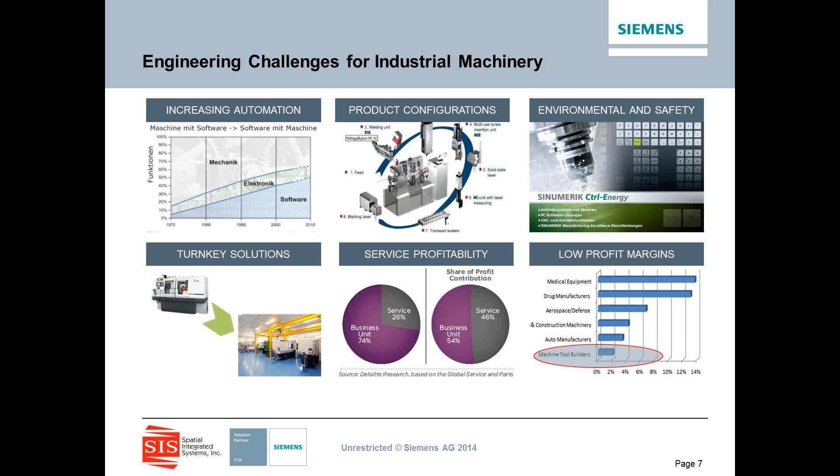And what the industry is seeing out there, and this isn't just what Siemens is saying, it's what analysts are talking about, is that machine tool builders, the last one on the list there in the bottom right corner, are seeing the lowest profit margins in history, while medical equipment and drug manufacturers, maybe not to the surprise of many folks on the call today, are very highly profitable areas in today's marketplace. So how do we help those machine tool builders? Because we still need that huge industry out there to be successful.

So when you look at the six images on the screen, what do all these products have in common, from beer to computer wafers to cookies, jewelry, maybe a tablet of some kind, and a tire? Well, the one common thing they all hold is the fact that each one of those is made with a specialized, complex piece of machinery. Right? But each one has a very specific task and how it has to accomplish those things.

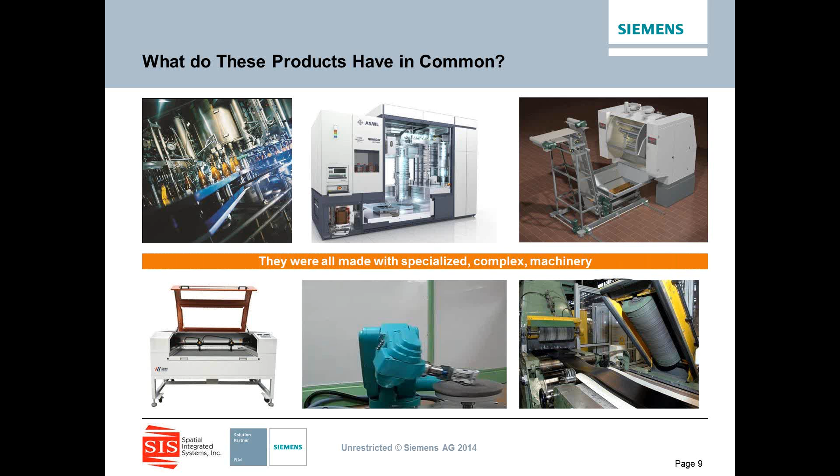And that's how NX can help you get your job done more efficiently. So what's the impact on the business? Really, again, we talk about you need to have machine design that's more flexible. We've got to make sure that it's not too difficult to reuse existing designs. So where there is some commonality from one machine to the next, be able to reutilize all of those components in your next design very efficiently.

Being able to find those components sometimes is just as important as knowing they existed in the first place. And most customers struggle with being able to find those previous designs. You need to be able to manage those customer requirements more efficiently and what your customer needs for their designs. And, of course, meeting those time-to-market goals. And we have a lot of tools to help you complete all of these tasks.

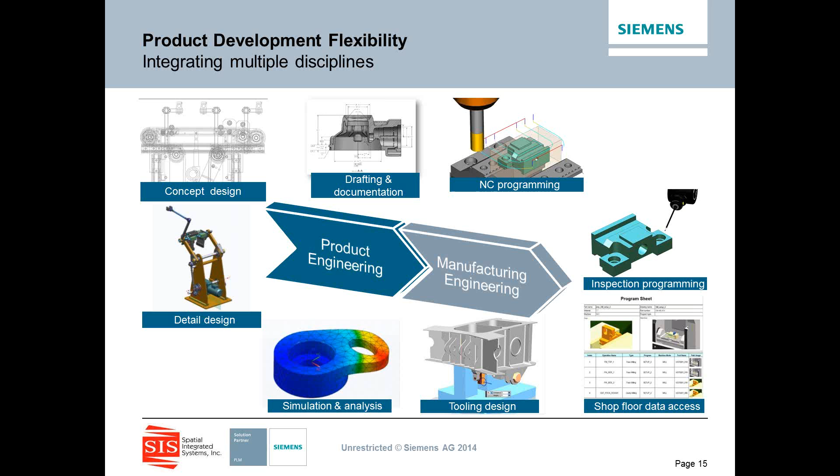We may need to do simulation and analysis to make sure parts aren't going to fail when they get out into the field. Of course, do the NC programming to put tool paths on these components and manufacture these on your shop floor. And for that, you may need tooling design, as you see in the image in the bottom of the screen, for fixtures. Again, NX is well suited to do all of these disciplines for you. And then finally, even inspection programming with CMM, coordinate measurement machines, making sure that you're checking those components, that they're right based on the original designs.

So it's one thing to talk about how all of those different things are required in your workflow. It's another to show how this actually functions through the NX product suites. And it's done in the way we call the master model process. It's all focused on reducing your engineering time, making sure you have fewer errors, because those errors are really the most costly of anything out there, and making sure that you have process standardization so you can repeat this process over and over in the future to be more efficient.

So when you look at the image here, really what it represents is a machine design on the left-hand side of the screen for the NX master model with thousands of parts and components in it, lots of moving components. This is actually one of our customers. It's a machine that packages up roof tiles.

Well, as you start that design, the standard workflow in the industry in the past was you'll design the entire machine and then start to pass that information downstream for maybe analysis, manufacturing, fixture design, those types of things. And if a change takes place, you have to stop all those downstream applications and kind of restart the process again, make the changes in engineering, and then pass those downstream again.

What's nice about the NX master model process is we can take these things and work on them concurrently versus in series, as an example. And by concurrently, we mean that we've already designed part of the machine. We take that on into analysis and simulation. We start to work on fixturing and tool paths. We can do all of these downstream applications to it.

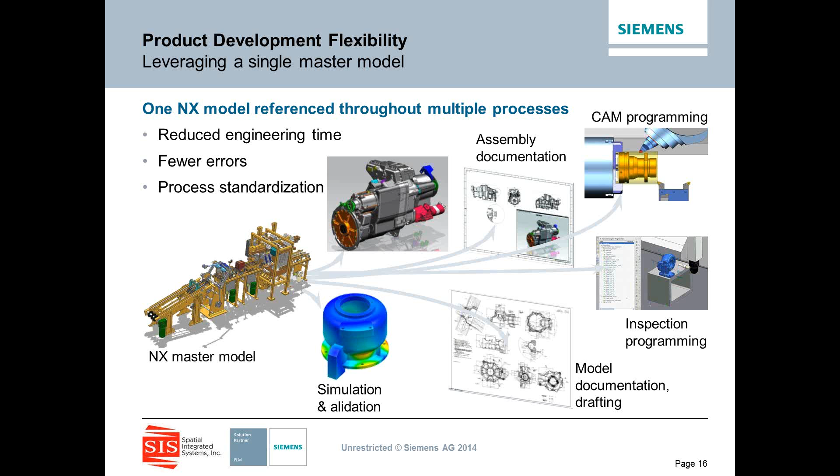So what happens when there's a design change that takes place? All of it ripples through the design automatically for you. As that design change happens, your analysis will be recalculated, your drawing sheets will be updated, your fixtures will be changed automatically, and your tool paths will update automatically. These are the time savings we talk about with a fully integrated solution that few companies offer in the industry today.

Now, when we talk just about the design side of things for a minute, so just focusing on CAD, we bring the best tools for you to boost productivity. First and foremost, we certainly offer parametric feature-based modeling. And that's traditional modeling where you go out, you put dimensions on a block, and if you change those dimensions, the block stretches to the new size. And that's been around for many years.

What we've introduced is a patented technology. It's unique to our company itself and Siemens, and it's called Synchronous technology. And this is a tool that allows you to use multi-CAD data if you want to. So I can bring in files from other CAD systems and make these types of design changes very quickly and easily. It allows for very quick design evolution and is fully integrated with feature modeling. So whether you want to use the feature-based modeling or the synchronous tools to literally stretch and pull your model exactly how you need it to look, they work at the same time together with one another.

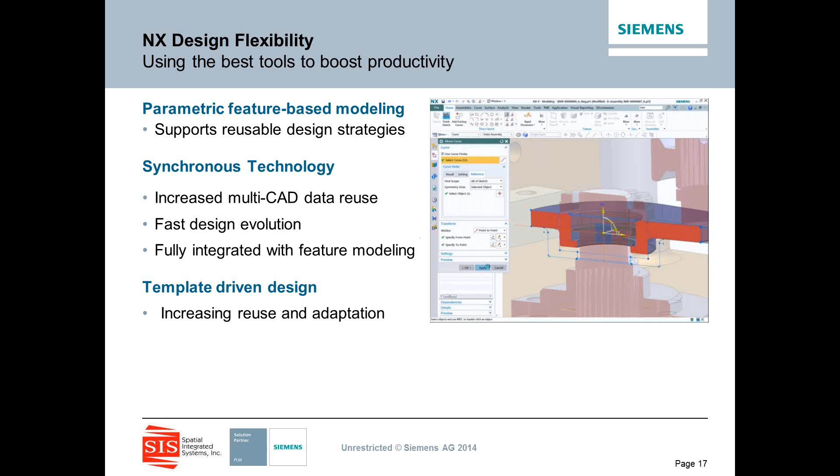And we have template-driven design. And what we mean by that is having tools to create family of parts type of solutions, but family of parts on steroids. And I'll describe that here in just a few minutes for you.

So let's look a little more at synchronous technology. As I stated, this is something unique to Siemens in the industry, unique to NX. And what it allows you to do is using it on existing files you've created in NX or on third-party files. It may be a STEP file. It might be a SolidWorks file. It might be a CATIA file. And you can bring these into the NX environment and make design changes to them.

Well, you can imagine if there were dimensions on there or if there were steps of how it was created originally, you may or may not understand exactly how that was created in the first place. So it's tough to know how to make a change. With Synchronous, you don't worry about that. So if I had a guy design this 5 years ago in my engineering department, I don't really care how he created it in the first place. I don't have to even analyze how he did that.

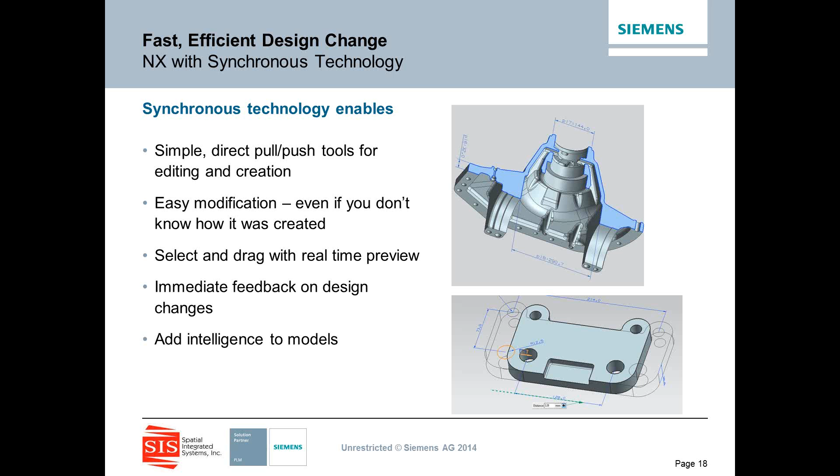I just go in, grab the faces I want to move. Maybe I want to apply some dimensions to it and drive those dimensions here with our Synchronous tools. Very simple, very easy, with immediate feedback, and you can add that intelligence to the model. So if you bring in a model from another CAD system, there's no dimensions or anything on it, we can place those dimensions onto it and drive those accordingly. Again, unique and incredibly powerful in the industry today.

The next area is something we call Product Template Studio. The images at the right start to give you a little bit of an idea of what it's capable of doing. But this tool is all about creating, you think of it as family of parts. So you have a part that may have 5 or even 10 different configurations that you may want. Now, most CAD systems out there today are going to give you the tools to make a family of part design. You can model it up one time, stretch the value, save it off as another design, and have those kind of in a chart. What we allow you to do with that, though, is actually embed validation.

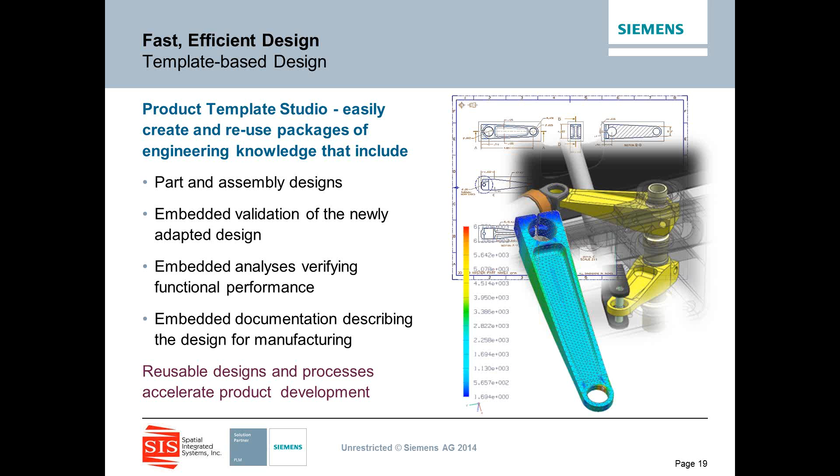And what we mean by that is you can embed analysis into this, you can embed the documentation into this, so that if you make a change, you can have a list come up on the screen of what component you want it to look like. You click on it and it changes. But as you change that, it will also do an analysis in the background. It will update drawing sheets in the background and give you any warnings or errors if those design changes would be something that couldn't be manufactured or might break under the day-to-day uses out there on the machine. So much more intelligent capabilities here than just creating some models and having them in a chart to select from.

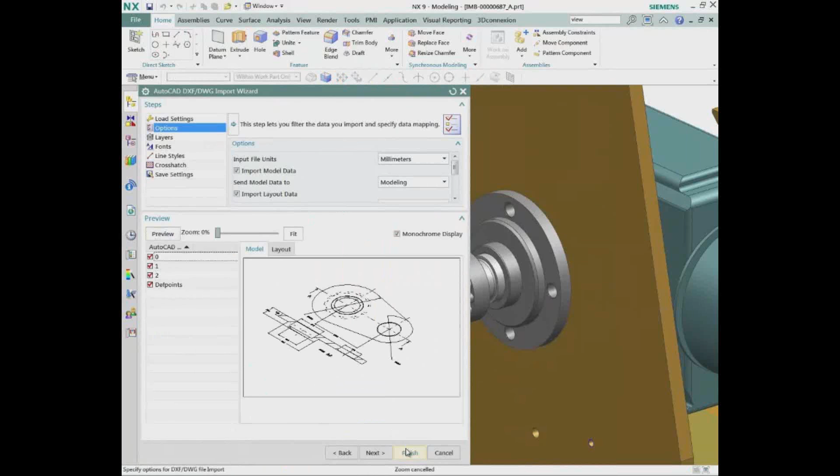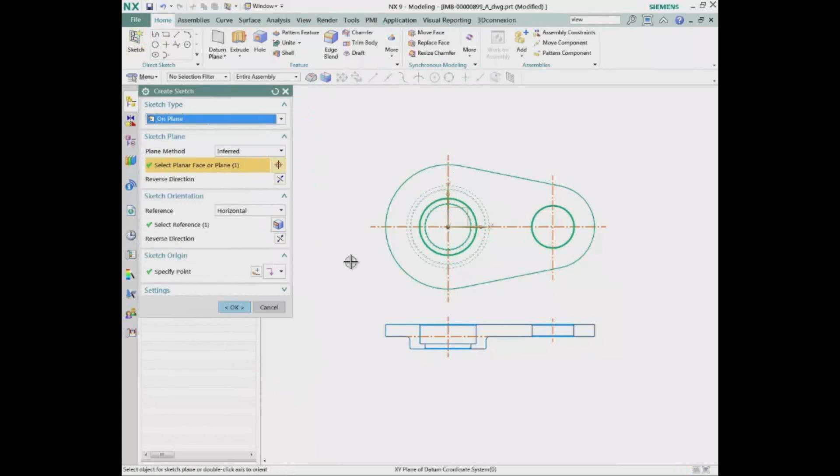So let's look at some of the capabilities here and what we're talking about inside of NX. If we go in and take a look at this, you'll notice we have a piece of machinery here. We need to build a coupling or a linkage between a couple components. And we're going to open an AutoCAD file. So with NX, you can open up DWG and DXF files. We can preview how those look and see what layers are turned on and off, those different types of things. Notice here, we've just brought this into our 3D environment, but of course it's just a 2D drawing, so it's sitting flat on the screen. We can still understand those layers as an example, so we turn off dimensions or different line elements we don't want to see, just to be left with geometry that you're really interested in here.

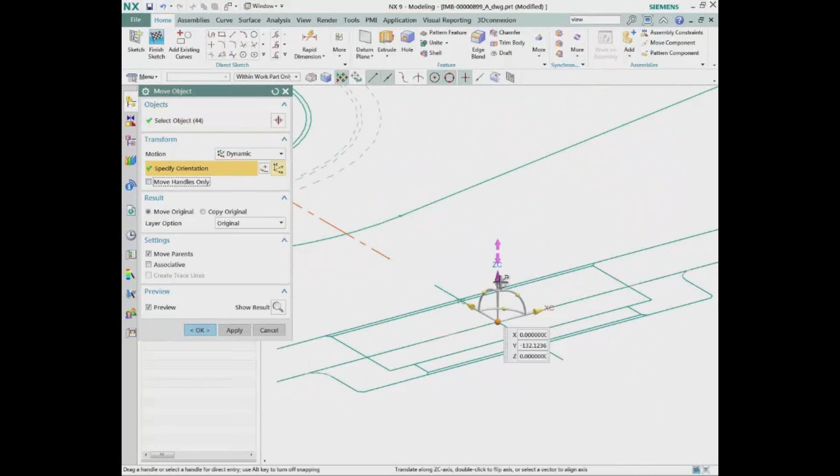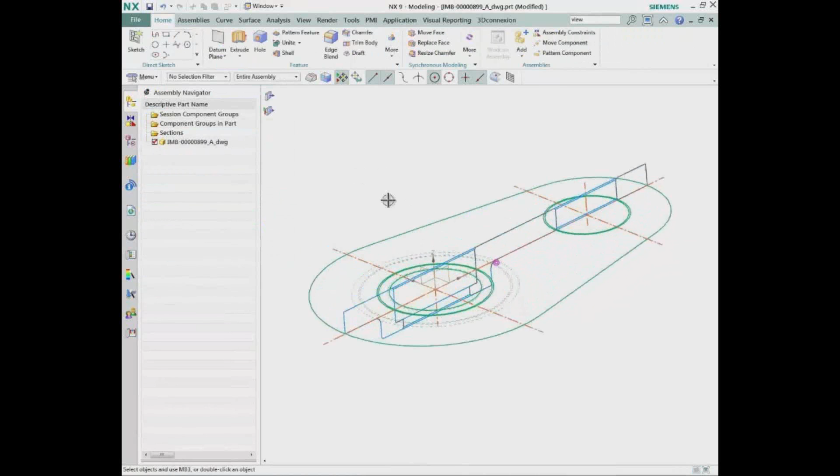And ultimately what we want to do with this is take this 2D geometry and turn it into a 3D model. Now, for those of you that work in CAD on a regular basis, you're very familiar with the fact that this is what we call dumb geometry, so to speak, in the industry, where even though I'm in a 3D window, if I grab one of these lines and just drag it out into space, it's just going to move a singular line element. There's no intelligence of the geometry linked to one another, like tangent or endpoints connected. Well, we do that automatically. Just by selecting on the geometry, we'll put that intelligence to it and make sure that endpoints stay connected, tangencies stay that way, a center of a hole stays centered on another hole out there for concentricity. You can do all those with just a couple clicks, like what you're seeing on the screen.

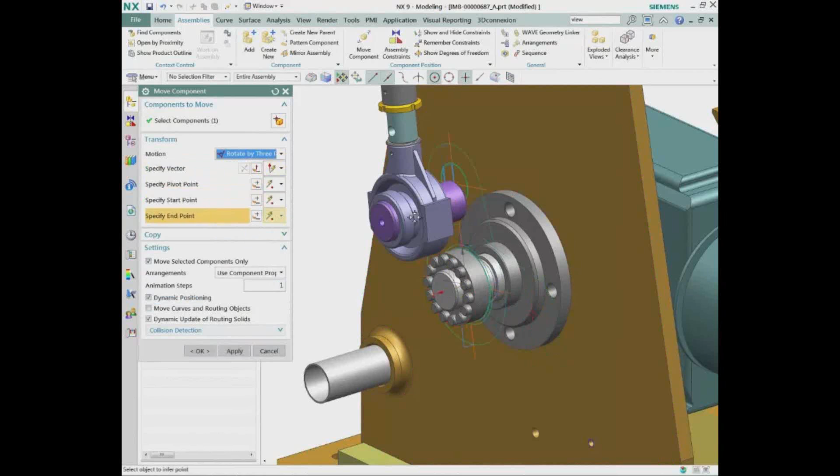Well, now that we have some intelligent 2D geometry, we just want to bring this into our 3D model. This way, even though we're in 3D environment designing our machinery, we may have some 2D geometry that we'd like to incorporate and utilize to turn into a 3D design. So what we're doing here is just grabbing on some shapes on the 2D model, grabbing on some shapes on the 3D design, and you'll notice how it's now placed right into the machinery design environment we're working on. So now we want to rotate the shape around so it matches up more closely with the other components there in the assembly. Notice how you rotate that around, but it doesn't quite line up appropriately with that other linkage. And that's not a problem. We're going to use Synchronous here in just a couple of minutes to solve that for us.

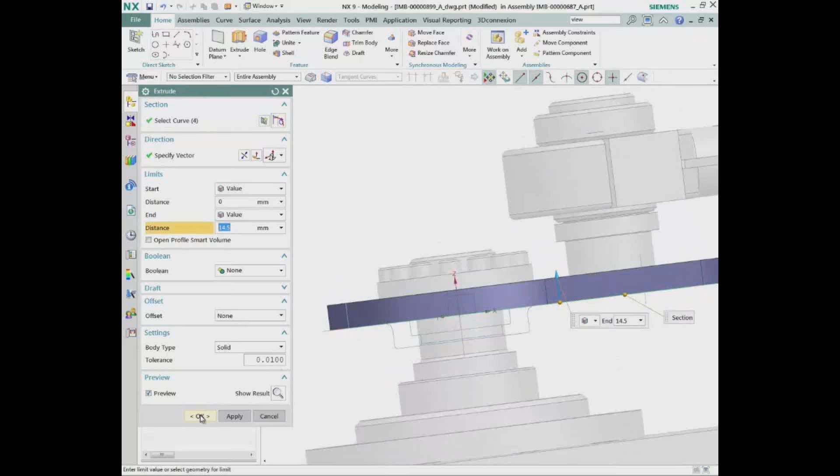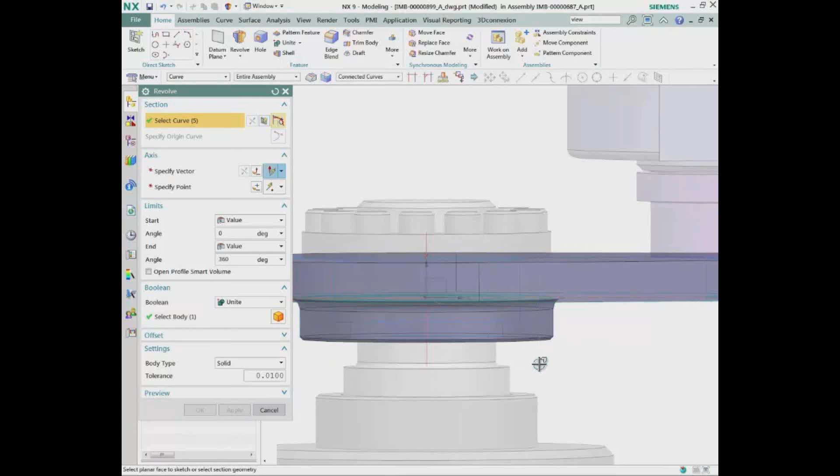So here we've brought in a part that is close to what we want for our final design, but it may not be quite perfect, but that's okay. We can tweak that to whatever we want. So notice how quickly and easily here we're taking these 2D sketches. We just grab on an element and pull or stretch on that to start to build this into 3D. Here we'll take a couple of other shapes that we want to revolve. They're circular in shape. We just tell it a centerline axis as an example and revolve that shape around the design. And then we also want to be able to remove some material on the inside where a shaft goes through this linkage that we're building. And so we'll just revolve another shape, but we told it to remove the material when we revolve that inside the parts. We're getting pretty close to our final design.

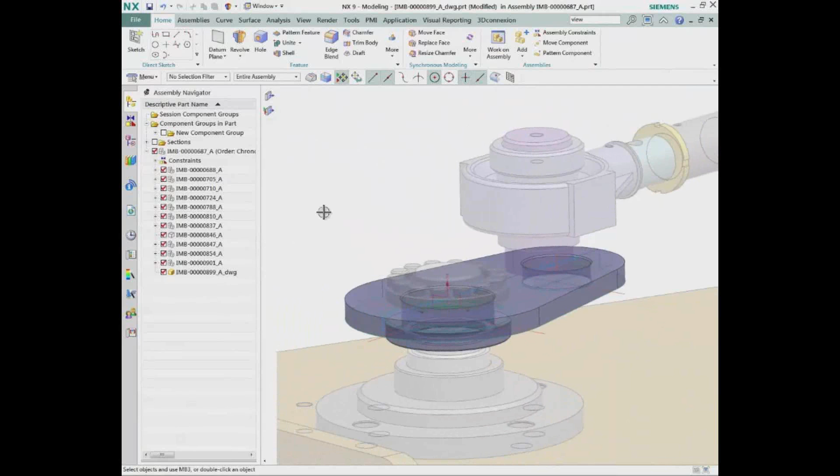And then obviously we need another hole out here. You notice it picked a line and a couple small chamfer edges, so it creates that hole with the chamfer for inserting those shafts. Still not lined up. Don't be overly concerned. We're going to fix that here in just a minute. But the next thing we'll do is dynamically slice through our assembly.

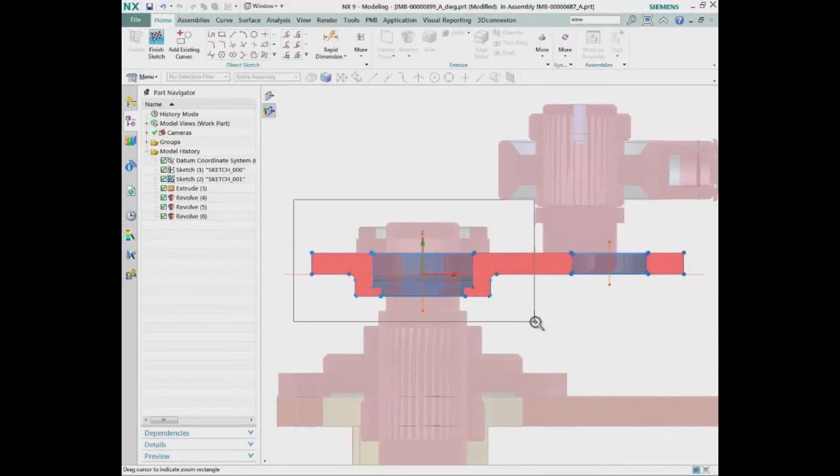And this just gives you better visualization capability in complex assemblies, to be able to slice through the assembly and look at it in an appropriate orientation so that you can really see and understand what's going on with the current design and make the appropriate design changes. So you have a lot of different tools at your disposal here.

If you want to, we can go in and take the existing sketches that came in that 2D drawing that we brought in, and we take those sketches and literally drag those around on the screen, put those into a new location, or stretch that geometry to another orientation. As you see happening here, we're making the diameter a little bit larger with those sketches.

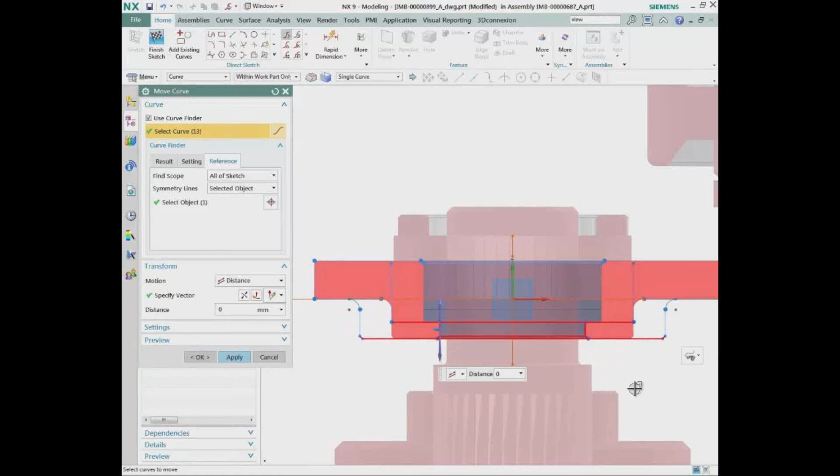We may also want to make this portion of the part a little bit thicker, because the geometry maybe for the application that we're doing in this machine is going to take a lot of pressure, a lot of load on this. So we want to make sure that we have as much material as we can. We're matching this to other faces out here. So here we're matching a 2D sketch to a 3D face. Now we can have the model update accordingly to it.

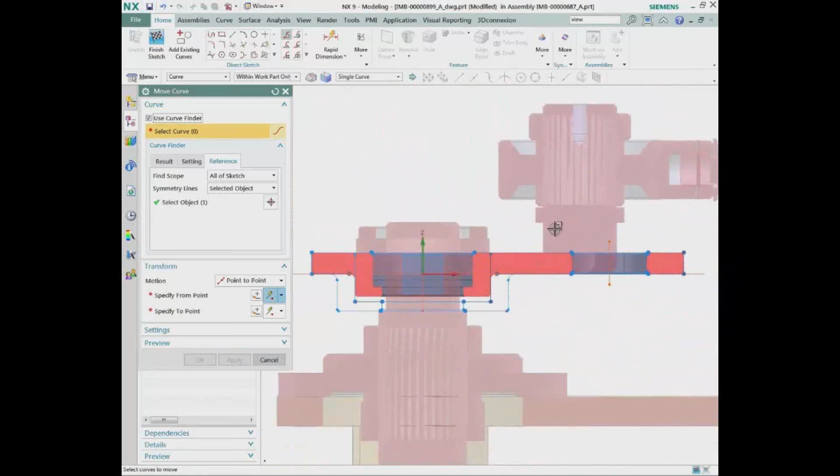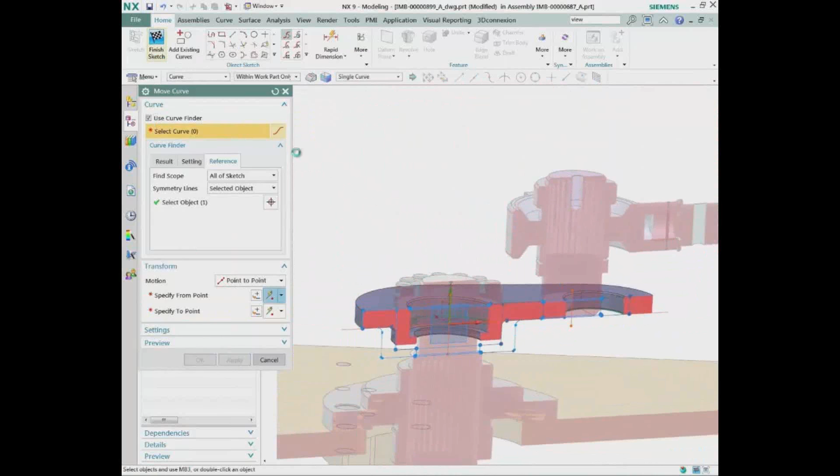So far we've just edited the sketches that were created originally within the design, but we can also use these same types of tools with Synchronous to tweak the 3D model so that they match exactly from one component to the next. So you can see, instead of going out and modeling this part from scratch, pulling something in that already exists saves you time and effort to at least get the initial design started. Then we can go ahead in here and really tweak to the final design how we want things to look.

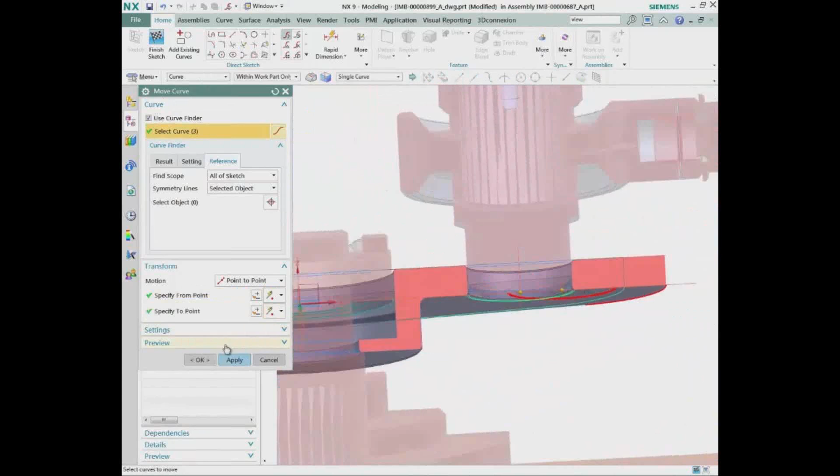Now here, we're just, again, looking at some of these sketches and moving these around relative to other pieces of geometry that we already have in our assembly. So we're just going to line up what we had in that 2D sketch to the primary shaft here for part of this linkage. And we'll go ahead and update that accordingly. And maybe a couple of other things we want to do.

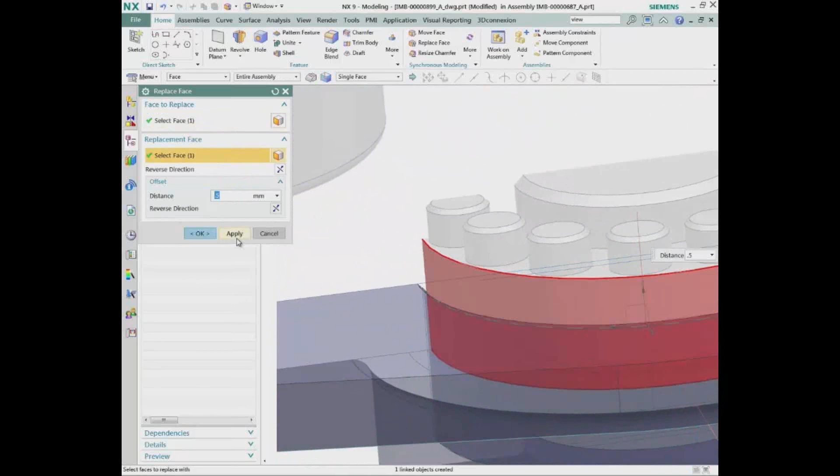You'll notice there's some gaps between some of the shafts and the openings we have in our parts. We want to make sure that they align to one another. They come close to touching one another. So we grabbed one face on our new design, a face on an existing part of the design. We're going to give it a little bit of clearance, about a 1/2 millimeter of clearance there, so it can rotate, obviously. And same thing here.

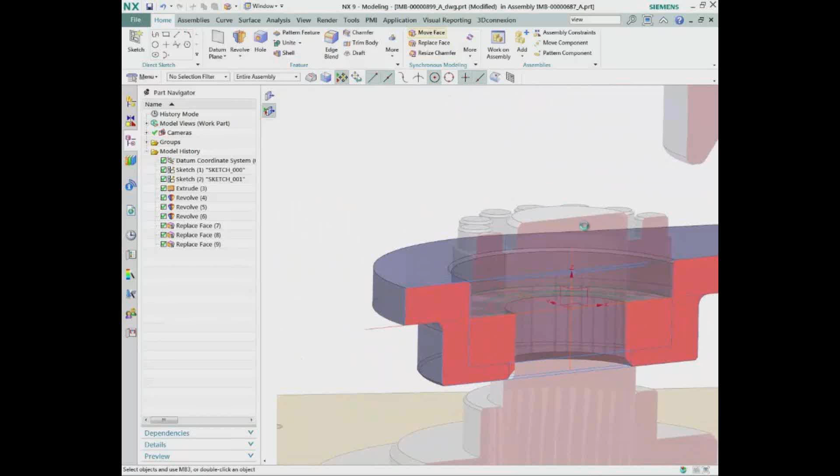We grab one face on the new design, grab another face on what already existed as a design, and modify the geometry to pull up accordingly and match to those. And of course, you'd have a little bit of an offset or a clearance, so you don't have too high a friction in those particular areas. So here within just a few minutes, we're able to take that 2D geometry, turn it into a 3D model, and make sure that it's matching with the rest of the design in our assembly. Make sure that these components are going to work relative to one another.

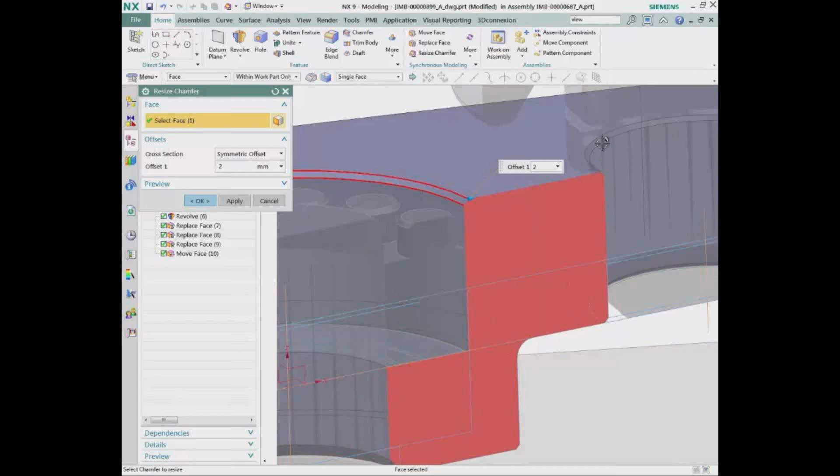Now, a little bit later, we're going to take this part that we're creating and actually do an analysis on it, so we can make sure that based on the loads that will be applied to it, that it can withstand those forces. And we've modeled that with heavy enough material, or maybe with a different material that might be stronger to withstand the day-to-day operations and rigors out there as the machine operates.

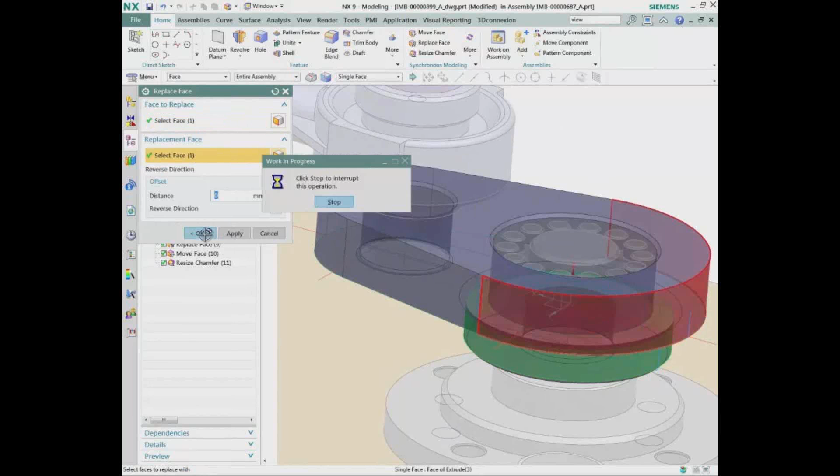So maybe just one last thing here. You'll notice that there's a step diameter on the underside of this component, and we want to make that a little bit larger in diameter. We're going to have it match this outer face. So it makes that a little stockier, very common design change you may want to do to a component out there. And you can see how we've added that to the material. And as we look at it, the design looks pretty good.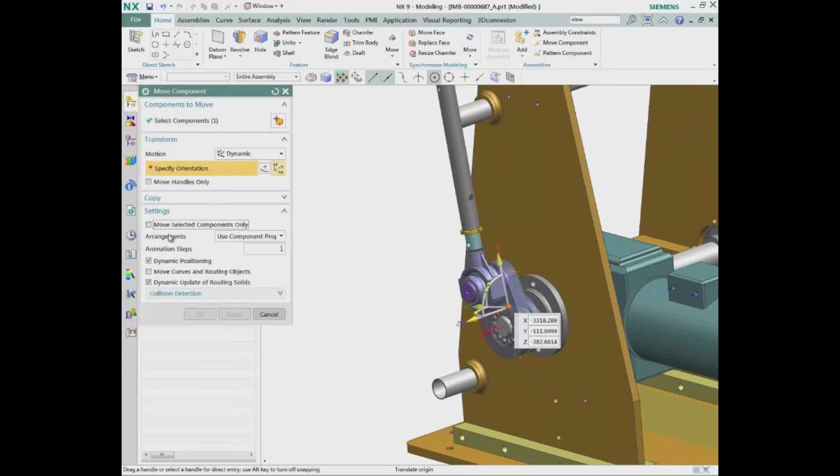We can still see the rest of our assembly out there kind of dimmed out. Now we've brought that back to life, so to speak, where we're bringing that in the forefront, and that's where we're going to work in the assembly. And we may want to see how components work relative to one another in that assembly environment. So the first thing we may want to do is, well, what happens if we turn the shaft that the motor drive will turn? What happens to these components? Well, you can see as they're linked together now, we can analyze their motion.

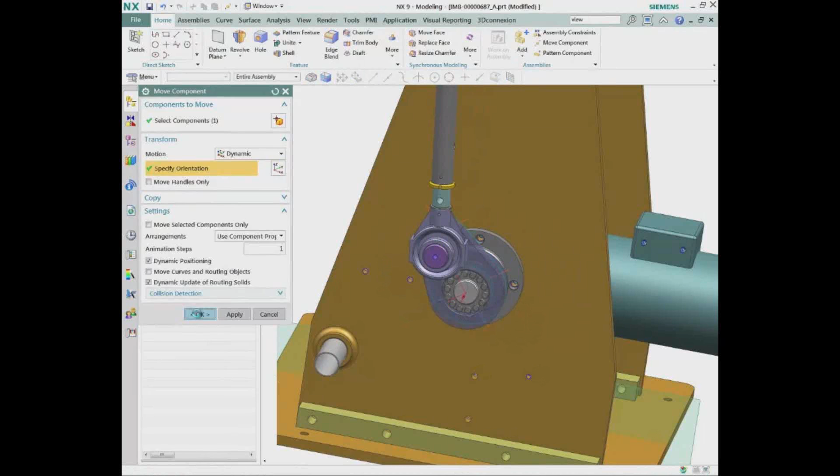We could also do interference detections and envelope detections, we'll talk about that a little bit later as well, on how these designs interact with one another. Well, we've got that on one side of our assembly, but if we rotate the model around, we'll notice that we don't have that particular component on the other side of the design.

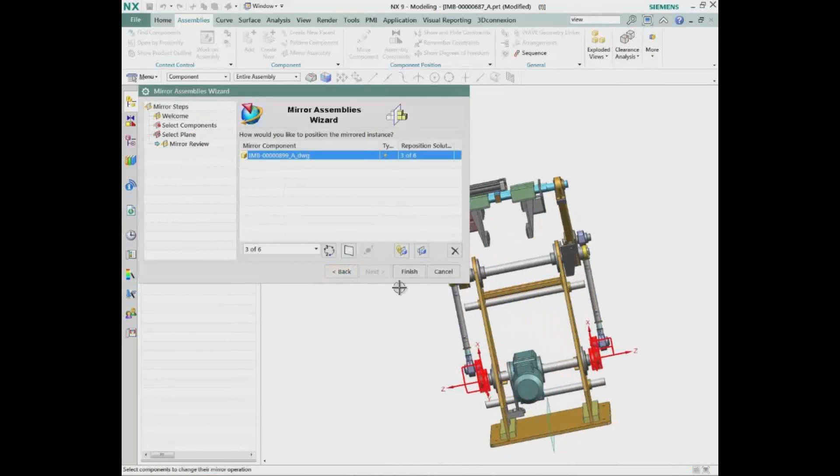So we're going to go in and do a mirror assembly. And you notice this is a mirror assembly wizard. This wizard walks you through the steps of what it takes to create a mirrored assembly. And we have a lot of these wizards inside of NX to make this happen more quickly, more readily for you, so you're not wondering how to do an operation in the CAD system. We'll walk you step by step through it just with one of the wizards.

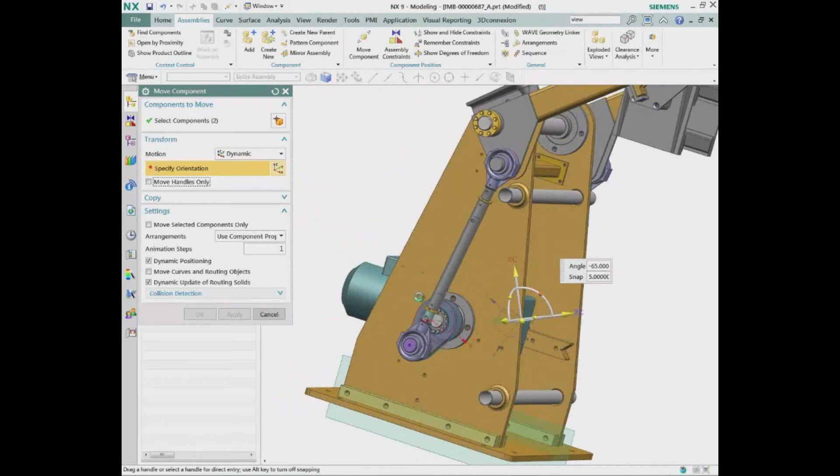Now that we've done that, we've put that on both sides. You'll notice now as we start to do the rotation, we can see how that works on both sides of our design and the complex motion analysis we may want to run through here. And with this data we can do any types of interference detection, collision, those types of things as we run through the design. So hopefully that gives you a good idea of just some basic modeling capabilities, getting things from 2D to 3D, working in that assembly environment.

So as we come back and look at some more of the capabilities that NX offers you is the ability to manage complexity. And that's critically important today because machines and pretty much everything in industry today are becoming far more complex than they've ever been. So being able to deal with this complexity, first of all, requires that you can work in the context of an assembly. And that's what you just saw that we did there, where I modeled that part. I did that in the context of the assembly where I could see the other components, making sure I don't build in interferences. In fact, making sure they match to one another as I modify the one shape.

But you have to have performance, proven performance in these large assemblies or even massive assemblies. Now, that assembly you just saw a moment ago was maybe only 50 or 60 parts. But we have customers like General Motors with 30 and 40,000 part automotive assemblies. General Electric Jet Engine Division that has 50,000 part jet engines. Or Electric Boat, another one of our customers that designs submarines with our software that literally has millions of parts in their top level assemblies. You have to be very efficient in how you manage that data, and we're really unmatched in the industry today.

Well, these machines that you design are very similar. They can get up into tens of thousands, if not over 50,000 parts very easily, depending on how large they are, and we manage that data better than anybody in the industry. And we do that not only through our CAD tools, but also with NX and Teamcenter.

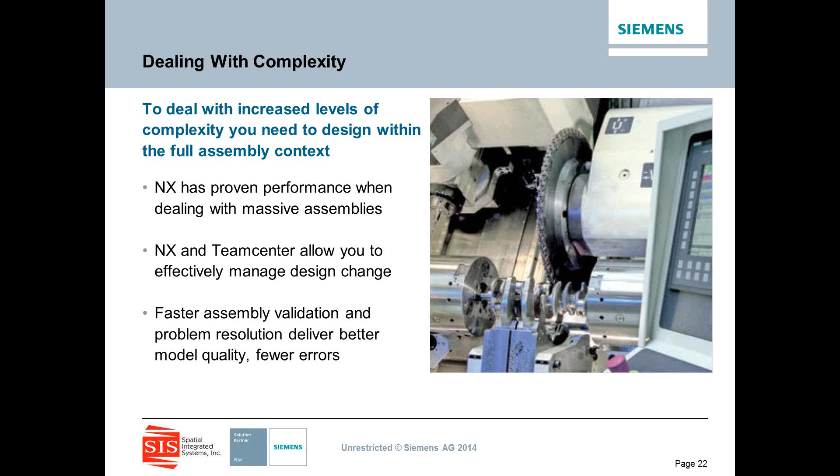And Teamcenter is our product data management solution, but a tool that allows you to also do incredible searches, very quick, to find components from the past. I talked about that earlier where you may have designed a machine previously. I want to reuse some of that data, but how do I find it? Teamcenter will let you get there very, very quickly. And of course, faster assembly validation, so you can resolve problems earlier in the design process, not having all those errors that you may see downstream.

So the first way we deal with some of this, especially in the large assemblies, is something we call active mockup. An active mockup allows you to do a complete digital mockup of not only the mechanical but the electrical systems in a machine, test those systems and see how that logic works with the motion analysis, and do that in these massive assemblies. And we can do this through the reuse of CAD neutral data as well. And what we mean by that is a format called JT. Think of that as IGES or STEP in some ways, but JT is a very lightweight format to be able to bring in massive assemblies into one locale at one time.

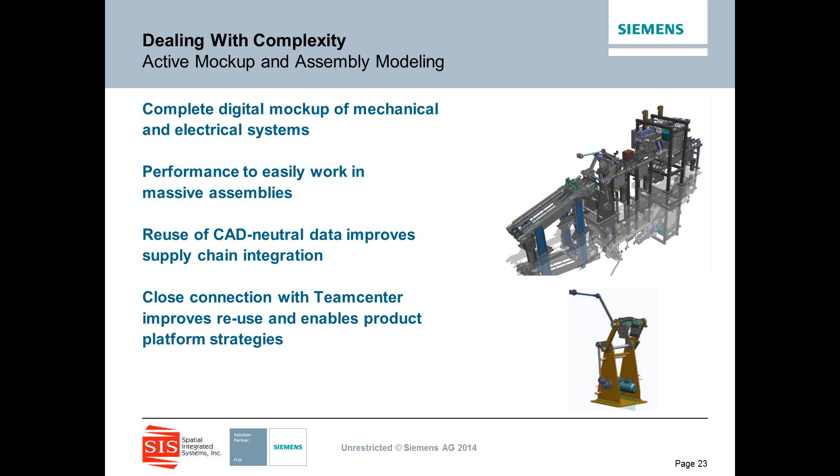Nice thing about this is it's become an industry standard so that most customers can create these JT file formats, and you can utilize maybe a sub-assembly to your machine that was created in an entirely different CAD system, bring that in through JT, utilize that in your design, and make sure that you don't have any of those interference problems. Look at motion studies, things of that sort. And of course, it can all be managed through Teamcenter to make sure you can find all of that data, look at different revisions of it, things of that sort.

So when we talk about faster assembly engineering, and you saw some of those components performed for you there in the demo, we really look at things like the interference checking, the parametric assemblies, mirrored assemblies, as you saw examples of. But as you get farther down the list, being able to manage things like weight management, not only knowing what the weight of a part is, but what about doing searches on components and knowing how much they weigh, based on what color they highlight on the screen.

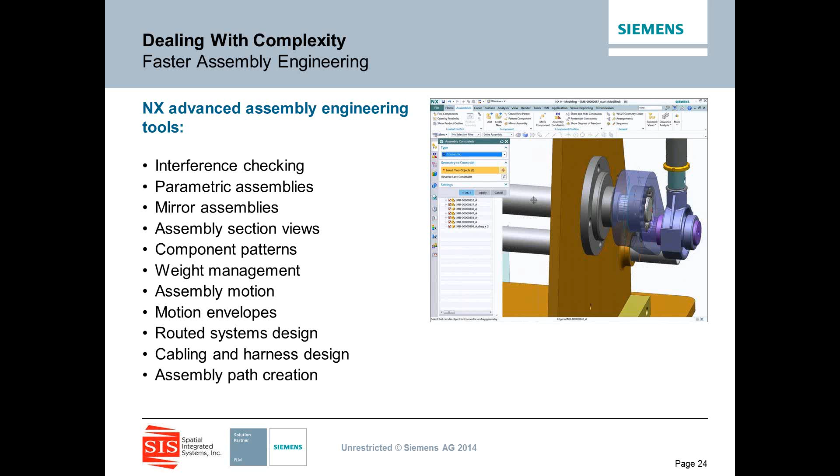Doing assembly motion analysis, looking at motion envelopes. A motion envelope is looking at the entire envelope that the part travels during its motion, and making sure you don't design anything else within that interference zone, so to speak. We allow you to do that. And of course, then you look at the routed systems, which is cabling, harness design, assembly path design for those cables, all integrated into one solution set to get your job done for these machine designs.

And finally, we talked about confidence in design, making sure that you know the product going out the door is going to work and perform the way you designed it in the first place. And we have a lot of different tools to make sure you're confident in that design. It's not just about, hey, am I confident my design team and my engineers did the proper work to get these machines designed. It's about having tools in your arsenal that allow you to make sure that the systems are checked automatically, even in the background as you're continuing to work day in and day out.

The way we do that is through these validation tools that we deliver within the system, and I'll give you some examples of a few different ones out here. But we can do things like checking critical function requirements or monitoring compliance for regulatory, functional, customer, engineering, manufacturing requirements out there. Maybe you're making machines that the FDA has to approve for food, moving food on a conveyor system and all. We can have all those integrated into the software, so that as you design, if something's designed inappropriately that wouldn't be approved, that will be kicked out automatically.

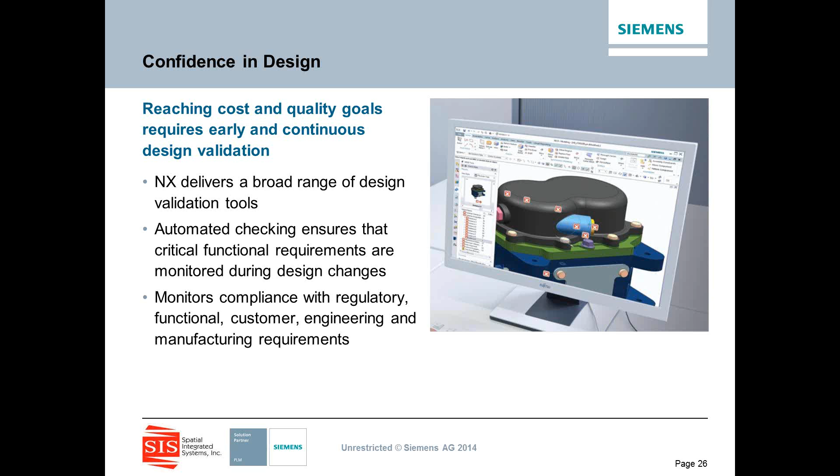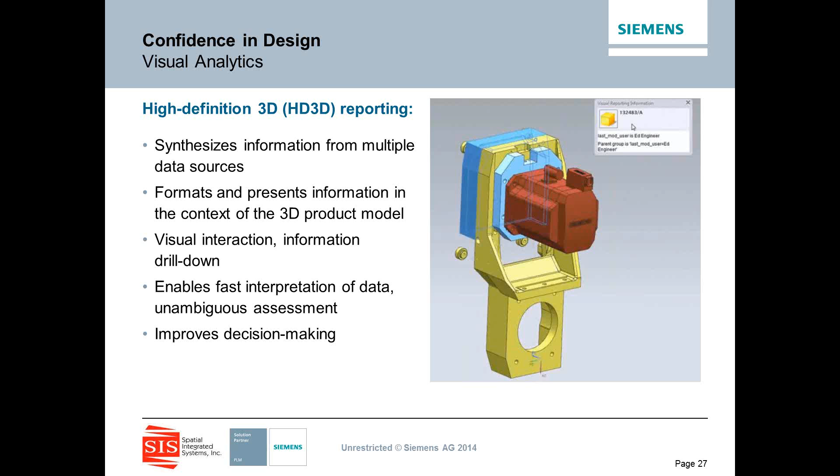You'll be notified. So the first way we do that, how do you get those notifications, is we have something called HD 3D, or high definition 3D. And what this really does is it gives the user, the designer, the engineer feedback on anything you've incorporated into a design that may be a valid type of design input, or it may let you know if there's some issues or some problems out there. And it will notify you on the screen. You'll see a little highlight on an area or maybe on a part model. When you click on it, you can get a little window like you see there on the right-hand side of the screen, letting you know what the issue may involve.

To take that even to a higher level with these design and requirement validations, you look at things through Teamcenter where we're managing all this, and we do things we call Checkmate is one example of that. Checkmate goes in and can run literally hundreds, about 900 out-of-the-box solutions for checking against everything from how your model was created, are the detail drawings done in the proper format, are dimensions in the proper style and format, are there any problems with how you created something out there in the assemblies.

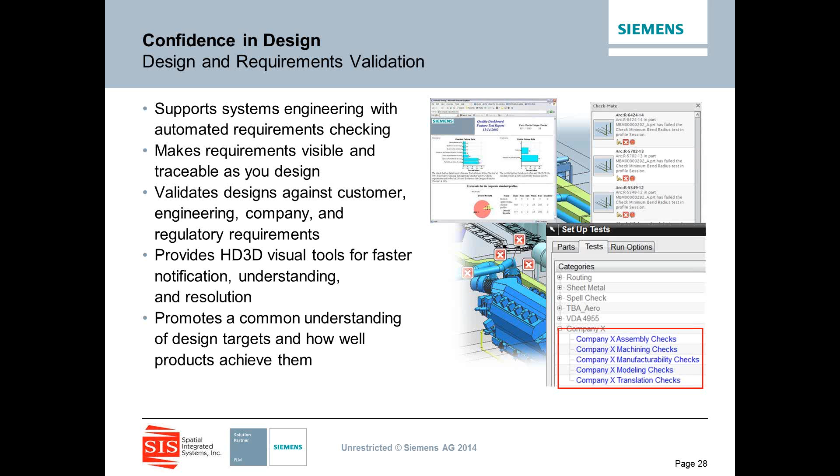And if you look in the image in the bottom right corner, these setup tests in this dialog, you may want to look at, for company X, here are the assembly checks we're going to do, or machining checks, or manufacturability checks. We can do that for multiple companies, for multiple iterations of your machine design, but do it all within one environment. So you can check and see what all that would work for different industries out there.

You don't have to be a high-end analyst to figure out how to run this. Again, it's a stress wizard. I'll show you an example of this in a demo here in just a minute. But it gives you the chance to look at some what-if simulations, right? Get some very quick feedback on the design.

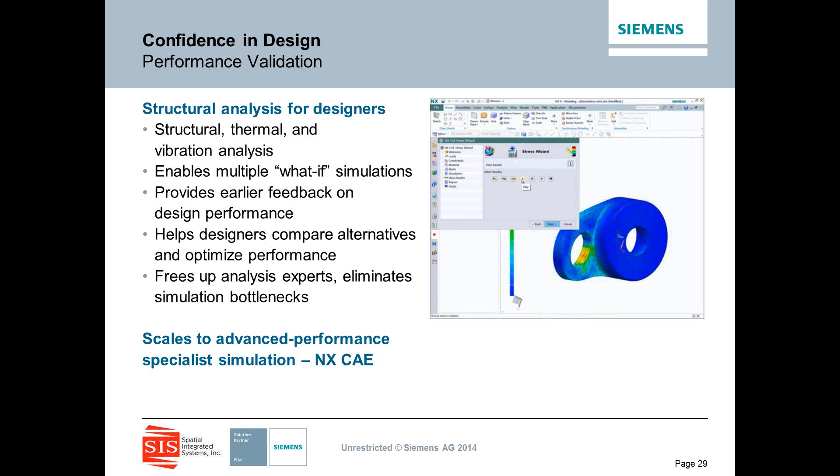It frees up the analysts so that they're not looking at every single component. Some of the engineers and designers can run some of these initially. And it eliminates that need for, all of a sudden at the end of a design, the analyst having to look at multiple components in a hurry to approve those to get them out to manufacturing. They can already be analyzed throughout the early design process.

And then manufacturing validation. This is an incredibly powerful tool where the system will automatically check things like, can this part be machined? What about if it's a molded part? So it's a plastic injection mold. Is the mold designed appropriately? If it's sheet metal forming, can that sheet metal part even be formed? If you're designing castings, are there issues within that, or assembly issues you may run into?

The way these tools work is they are set up in advance, so you have them running all the time. As the designer goes in and starts to create things, if there's an error someplace, you'll see a little red X on the screen, like what you see on the image on the right-hand side of the screen. When you click on one of those, it'll bring up a small window and notify you that, hey, that hole is impossible to put in that location because there's no way to get a drill bit into that location. You've built another piece of material over the top of that, and it would just be impossible to incorporate.

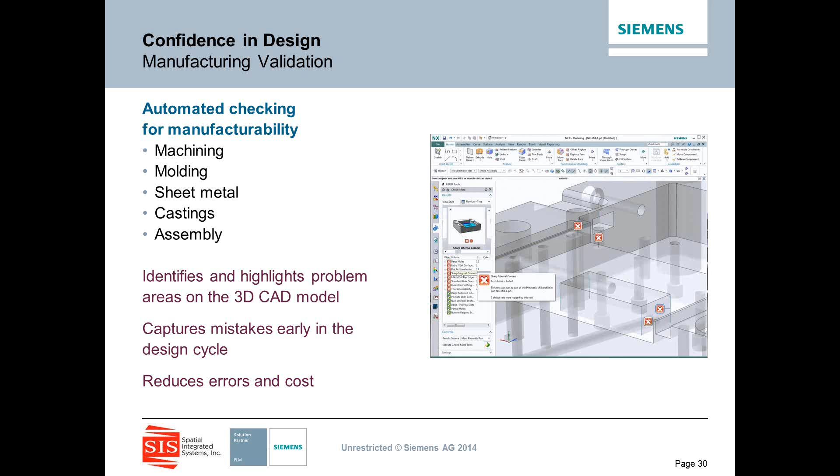Or you may have undercuts, something that's impossible to machine. Even using an electrode, you couldn't create that particular shape. The software would let you know that. And that's just one example, but this works for all different types of areas, including, like I said, sheet metal forming, casting, assembly requirements, all those things. Well, this reduces all of those errors right up front in the engineering and design cycle, getting that time to market much, much more quickly because you're not making these changes after it's already been manufactured.

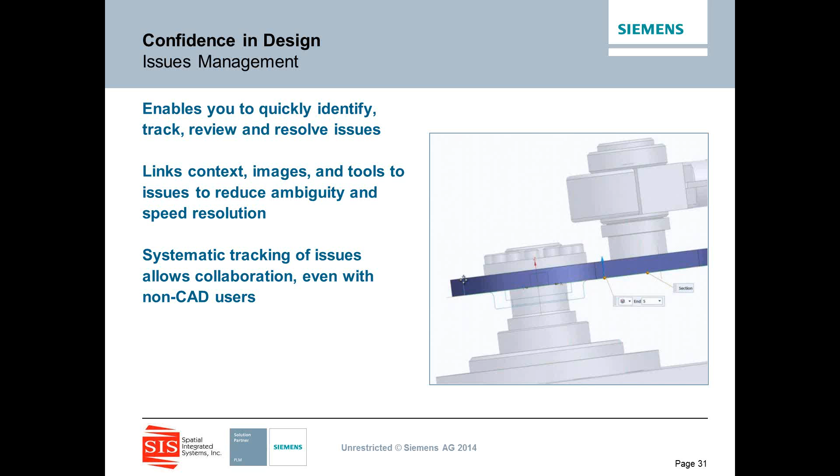And we also have issues management tools. Now, what this does is it takes all the things I just discussed over the last few minutes, but allows you to take this outside of the traditional CAD user environment to allow everyone to collaborate within the organization. That way they can see this information, they can get feedback on this information, maybe sign off approvals, things of that sort, and that's all built in with our issues management capabilities.

So let's just take a look at some of the analysis tool capabilities here. As I open up this part, we're going to change view. So you can see this is the part we just created in the assembly a few minutes ago. We want to go and run a quick analysis on it. So we're going to run one of our stress wizards. Again, building on the base product of NX, we want to just set up a quick analysis. So we're going to say, there's the part we want to use.

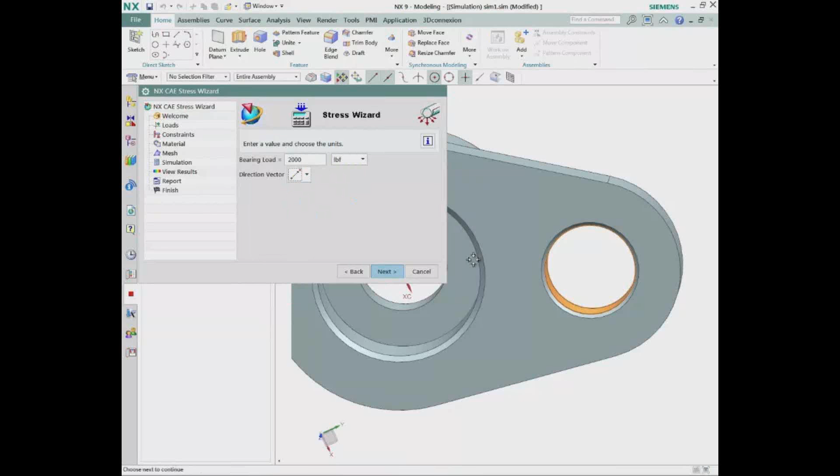Now we want to apply a load. We're going to put a bearing load on that hole that was just selected. And maybe we'll make that about 2,000 pounds of force, based on that rotational force you saw earlier. Again, someone will get some basic feedback on what those loads might be, but it is critical to be able to apply the loads appropriately, whether it's a load across an entire face or an edge or here a bearing force. And then we'll come back and tell how we're going to hold this part down.

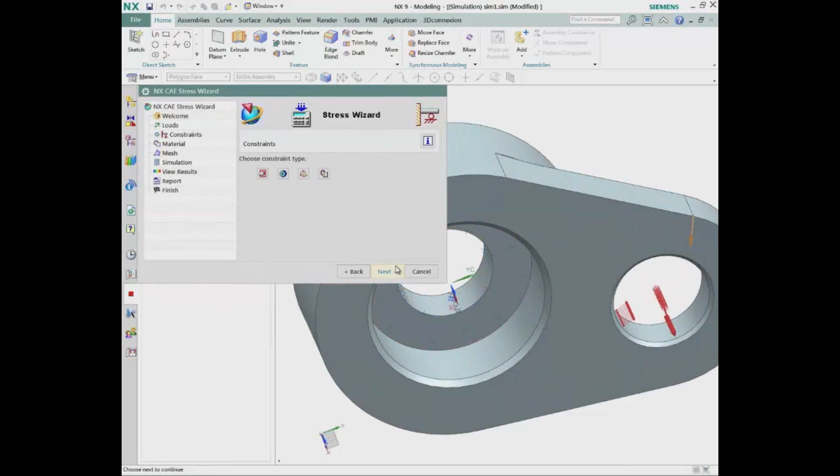So what we're saying here is what's highlighted in orange on the screen won't move, but as we apply a load, what's going to happen to this part? One of the last couple things you do is assign what the material is. It will be different depending on what it's made out of, and how big the little triangles are that you're going to see come up on the screen in a minute. For those of you that don't do analysis, all the triangles represent is small nodes that are used to analyze the model in smaller pieces instead of looking at the entire part.

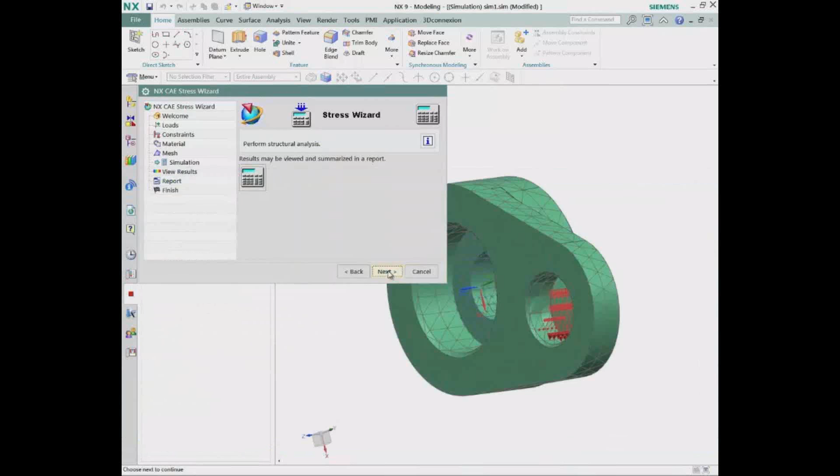Well, now we'll analyze that, and if that needed to be more dense, if it needed to be more triangles, the system would tell you that based on the material characteristics and the loads. It would make it more dense. There would be a lot more triangles out there. So here's the result, and you can see by the color coding where the highest stresses are in red, or in the lighter colors here.

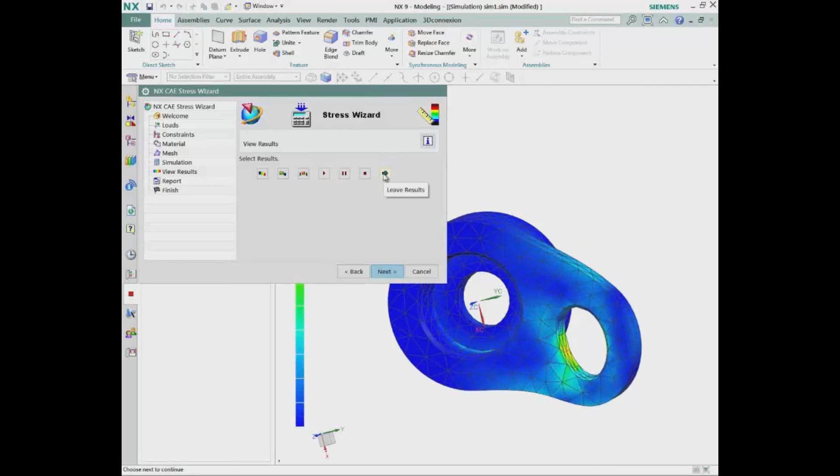But you can also, and it's over-exaggerated to see how that hole would stretch based on the applied loads, but you can also run an animation on this. So you can see, based on that load and the direction that's being applied, how that's going to work apart. Now again, it's intentionally over-exaggerated so you could see it, because in the real world it may only be thousandths of an inch, but that's enough to make that part fail over a period of time.

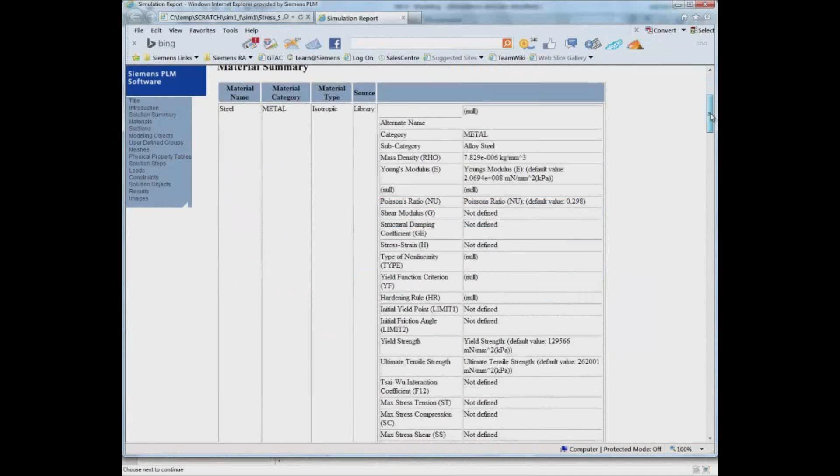So this can all be done by the base designer, even with a click of a button, creating a report. And this report is everything we just did there, just in a matter of seconds. They created this entire report for what's the mesh density, what were the loads that were applied, what are the results of that, and put a few images out here as well of what the results are.

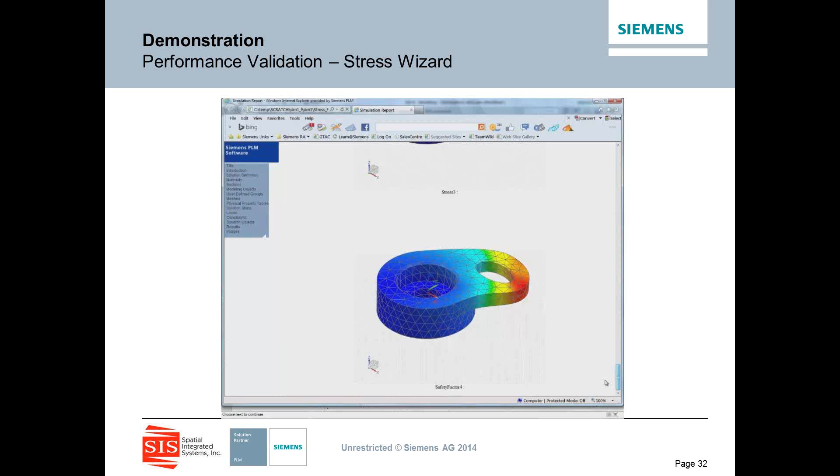This can then be passed off to the analyst expert, and he can review this very quickly and decide, oh yeah, that part's fine, go ahead and release that to manufacturing, or no, I may need to look at this in a little bit more detail. So those are some of the strengths that we offer inside of NX to make that machine design that much more efficient.

So to close things up this afternoon, we'll talk about the successes with Siemens and SIS and some of our customers, and just a few of them here to discuss very quickly. Index, they're the largest turning machine manufacturer in the world, and they saw that by using our software, they're reducing setup times by up to 90% on their machine designs. ANCA, another machine designer out there, reducing their time to market by incorporating our NX tools, and saw that their engineering time was reduced by up to 50% in many cases.

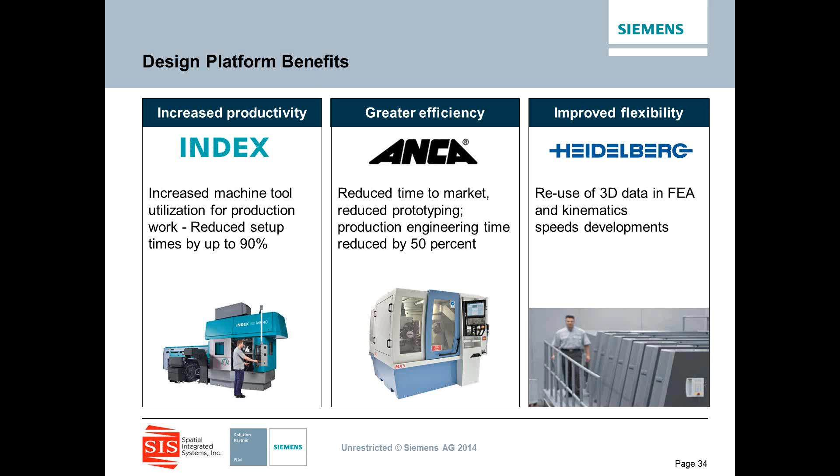And Heidelberg, the world's largest high-speed printing press company, they talk about how powerful it is for the reuse of their 3D data and the FEA analysis and kinematic or motion analysis that we have built into our product to evaluate their machines, make them as efficient as possible, and making sure no errors as they ship these out the door.

So, in closing, as a summary of what we've talked about, CAD data management, not only is it designing these tools, but also managing this information and making sure it's shared amongst everyone in the organization. That visual collaboration we talked about, again, everyone looking at it, seeing it, and having input. Quick and easy geometry creation with patented and unique tools to NX like Synchronous technology. Best practice reuse capabilities where we brought in 2D AutoCAD data and we reused that, but then tweaked it to fit accordingly into our design.

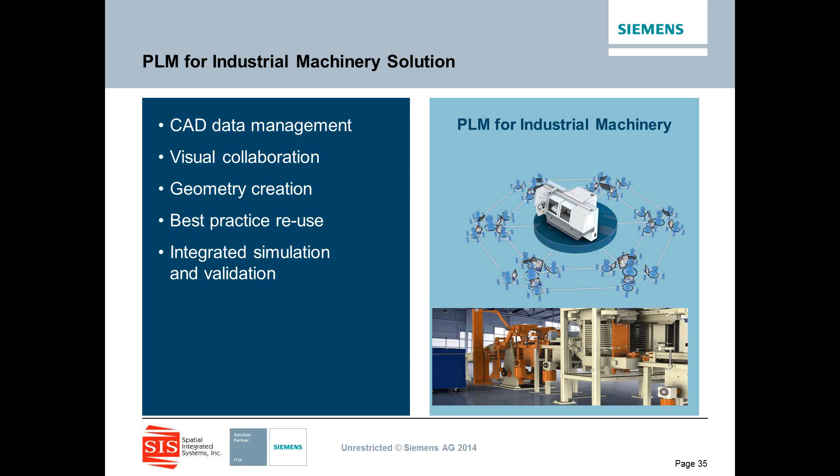And all having that integrated with simulation, validation, manufacturing processes downstream. We talked about that master model concept. If the part model changes, everything downstream changes. You don't have to go in and manually make all of that. That's what's going to save you time and make you more competitive in your specific industry.